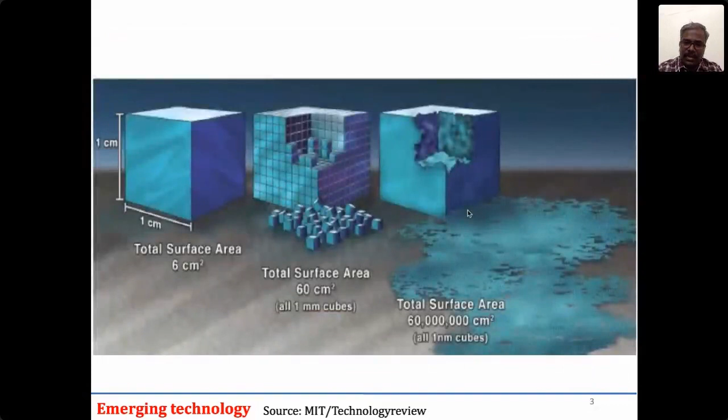So again, we come up with the latest technology combining with the earlier one, like nanotechnology with textiles, with roadways, with automobiles, with computers. So all the industries are interconnected, interdisciplinary towards nanotechnology, which gives efficient use of energy. And what do you mean by nanotechnology? This is a general outline of nanotechnology.

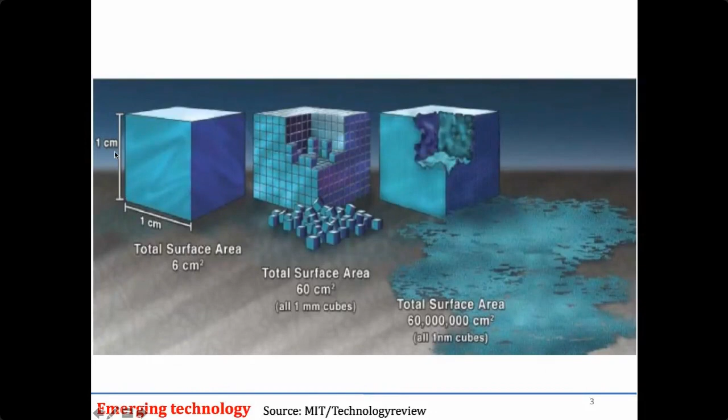For example, here we can see there is a square box, a 1 centimeter by 1 centimeter cube. In this cube, we can see the total surface area. The first one shows around 6 square centimeters.

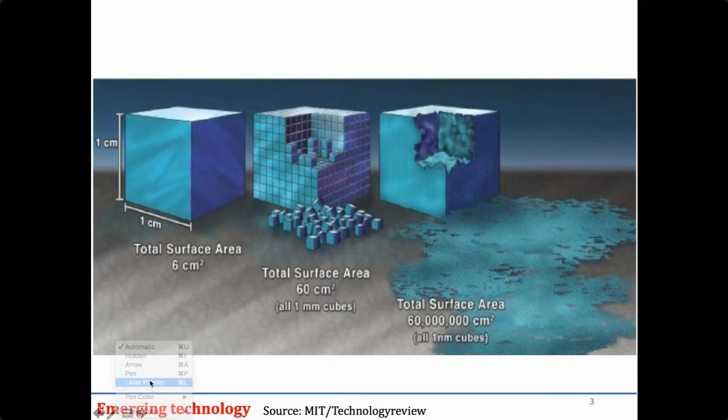So it shows 6 centimeter square. But when we see here the second square cube, it chopped about 1 mm. We can see it can cover a surface area of 60 centimeter square. So when we chop the square cubes into 1 nanometer, we can see that 60,000,000 centimeter square can be generated. That is, significantly, we can see that from bulk, that is big size, to small size, it can increase the surface area.

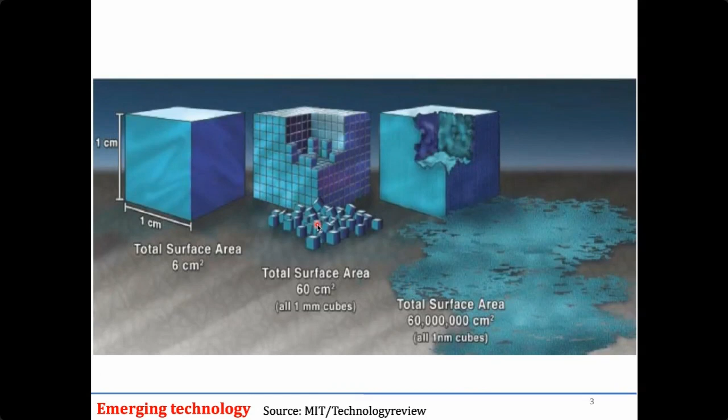So this is the ultimate aim for why the emerging technology, nanotechnology, was implemented in all the industries. And what are the ways and approaches by which nanotechnology was implemented? Nanotechnology was implemented with two different approaches for fabrication of the devices. One is a top-down approach, the other one is a bottom-up approach. The top-down approach is generally called physical methods. The bottom-up approach is called chemical methods.

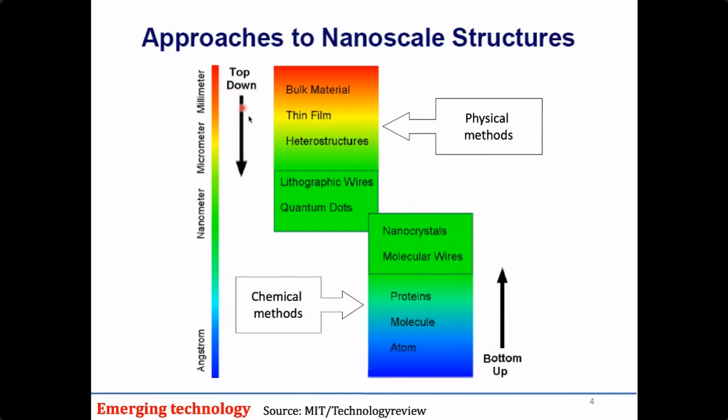That is, we take some molecules, atoms, all those things, from molecules and atoms towards nanomaterial. Nano means 10 power minus 9. So till that range, it will be designed. And if you take the top-down approach, as we have seen earlier, like a bulk material, from the bigger size to smaller size it keeps on moving by using physical methods, like you can chop it, grind it to small size, or else you can go with coating, like the evaporation method. There are different coating techniques. So these are the two different ways the materials can come into fabrication point of view.

When we see the second aspect, wearable applications: smart watches, activity trackers, smart glasses. All these applications are not only for one aspect. For example, a smartwatch is not only able to show the time alone. It can show our physical aspects like step count. It can act as a pulse monitoring system, showing heartbeat pulse. So there are multi-applications, multi-scenarios involved in this. That's why it becomes smart. We are majorly working on wearable applications, because wearable applications have a major role in our day-to-day life.

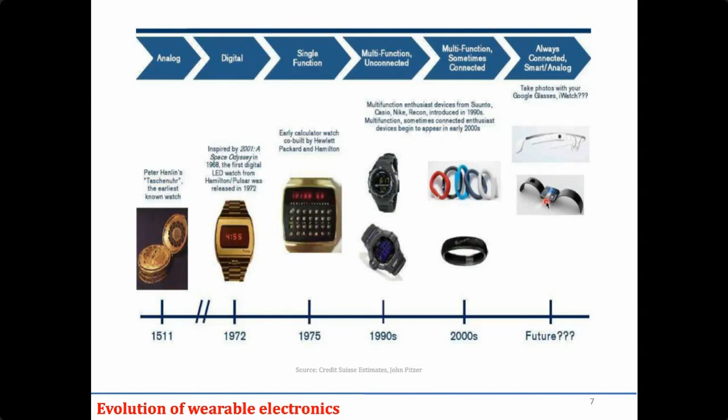And now the future is expecting more than that, with low power devices which can work on very low power, so they can go for a longer duration. That is what the future is expecting. But let's see the current global scenario: how wearable technology became more important and how the investment and technology boom was going on.

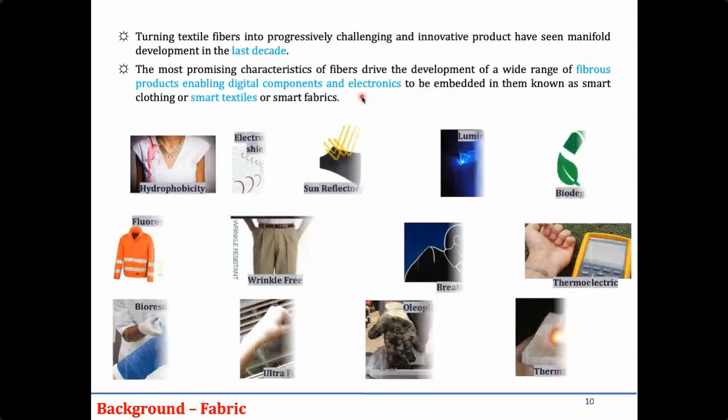And if you see the outline of textile-based technology applications in IoT applications, and not only limited to IoT, even beyond that, first we start with hydrophobicity, which is water repelling.

So the textile cannot absorb the water, it can repel the water. And the next one we can see is electromagnetic shielding. Electromagnetic shielding, in the sense it is able to block the electromagnetic waves, so the EM waves cannot penetrate towards your skin, because whenever the electromagnetic rays or the UV rays penetrate towards your skin, it leads to cancer or skin defects.

So to avoid that, what people try... Electromagnetic radiation is majorly involved in towers and X-ray rooms, all those things. And UV rays are day-to-day life. We are using sunlight. From the sunlight, we have three different regions: UVA, B, C. UVC does not reach us, but A and B will be there. And if A and B reach your body skin, it tends to cause cancer. So that's why people wear different colors, and dyes and colors were implemented to protect from the UV rays from the sunlight and illumination.

So there are many different applications, even wrinkle free, which is available in India. So no need for ironing every day. It's not required to iron for your lifetime. It's wrinkle free. The shirt was developed by Arrow Shirts. And even breathability. It can filter, like a kind of mask.

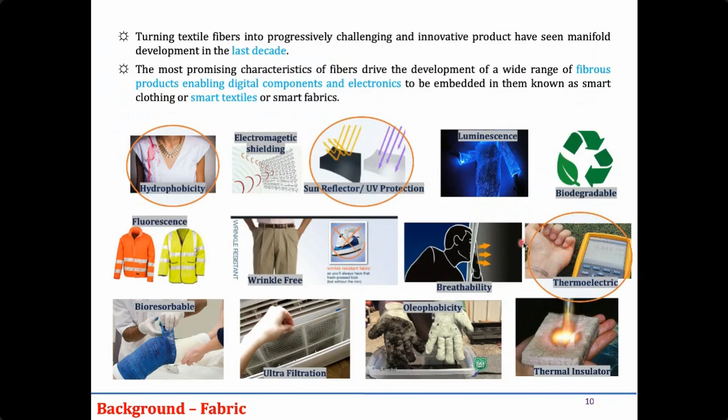But what we are doing in our lab is we are focusing on three applications. One is hydrophobicity, UV protection, and thermoelectric. Thermoelectric is like heat energy to electrical energy; the body heat can be converted to a voltage. So that is the purpose, we are working on these three applications.

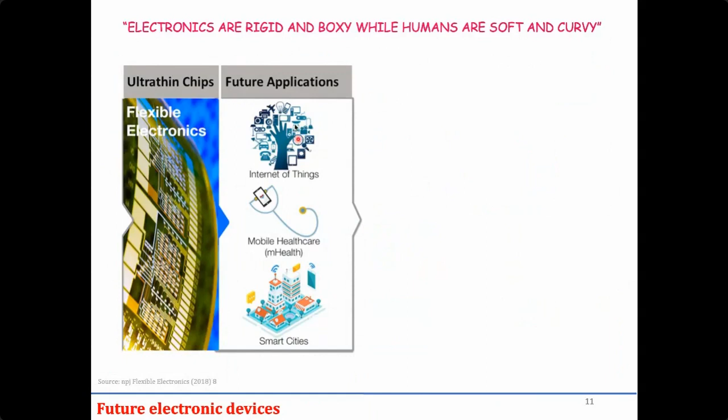And finally, we are moving on to how the technology will be involved and what sectors it is majorly working on. For example, if you take flexible electronics, there are three different applications people are working on. One is IoT, the other one is mobile healthcare, the other one is smart cities. So if you take any sector of the future applications, it involves four more subcategories: communication, integrated circuits, data management and energy.

Communication in the sense, for example, if you take mobile healthcare devices, ECG monitoring is going on from the body, and it is able to communicate with smart devices like a mobile phone or other devices. Integrated circuits in the sense, multiple chips can be integrated into a single chip, and it gives lower power, ultra-low power consumption. And data management: it has to collect the data daily, and it also predicts what happened in the past and what will happen in the future. So finally, energy. For all these three, to run them we need energy.

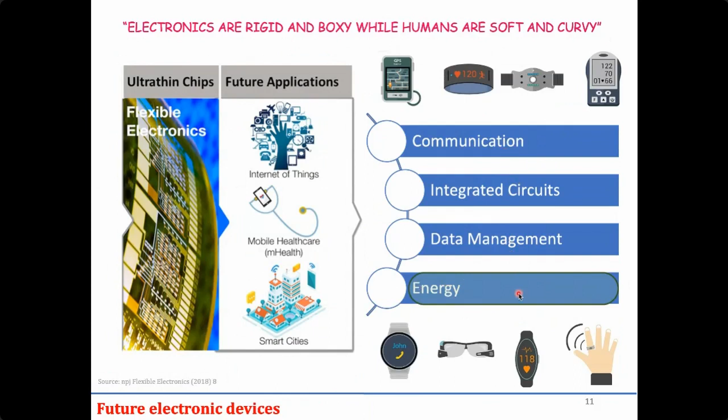So we can compromise based on the application aspect. If it's more from the communication point of view, we'll focus more on communication. If you focus more on ultra-low power sensors, we go with the integrated circuit. If it's more the data aspect, we go with the data aspect. All these three are interrelated, but we can vary them based on the applications. But energy, we can't do that. Energy remains the same. So energy plays a major role for all this. We can compromise the others, but energy we cannot compromise. So that's why in our research lab we are focusing on energy applications.

So when we talk about energy applications, what will it generally be? Whenever we talk about renewable energy, it should be new renewable energy, but it should protect human life. It should not affect human life. So that is the major scenario. For example, today's challenge is global warming. With global warming, there is a decrease of energy resources. Due to this, CO2 emission keeps on increasing, and the sea level keeps on coming up. So due to that, we need energy that is renewable and green in nature.

So it should meet certain criteria. For example, it should be safe, not harmful to the human body, and it should have sustainability, that is, it should not break down in a short lifetime, but be easy to dispose of, because whenever we develop any technology devices, a major problem is disposal. So how electronic gadgets or electronic devices can be disposed of easily, that also we should consider when we go with new renewable energy. But whatever we do at the laboratory scale, it has to scale up with the technology also.

So that is a way of incorporation into technology. That is, small devices which are a prototype or proof of concept which we're developing in the laboratory have to go with the technology, and with a longer lifespan also. For example, if I do some technology development today, it has to last not for a year, it has to go for a decade. So it has to go for a longer lifespan with minimal maintenance. That is a major advantage we require when we go for renewable energy.

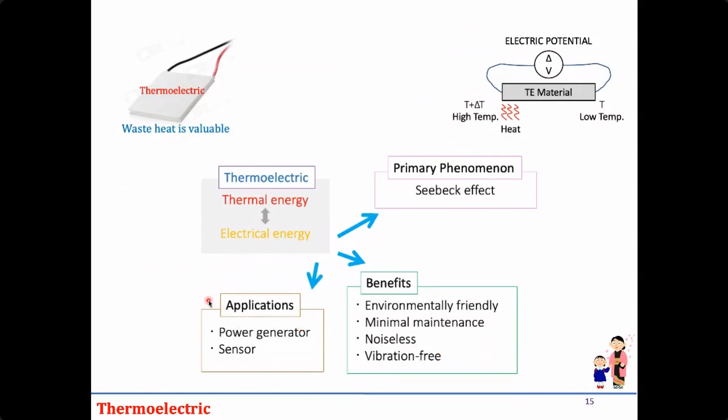And with thermoelectrics we have more advantages, for example very minimal maintenance. Environmentally friendly; we know that solar and this are both environmentally friendly, but very minimal maintenance is required, and it's noiseless. It doesn't give any humming noise, and it's vibration free also. Thermoelectrics have two major applications: sensors and power generators. We are working on the power generators.

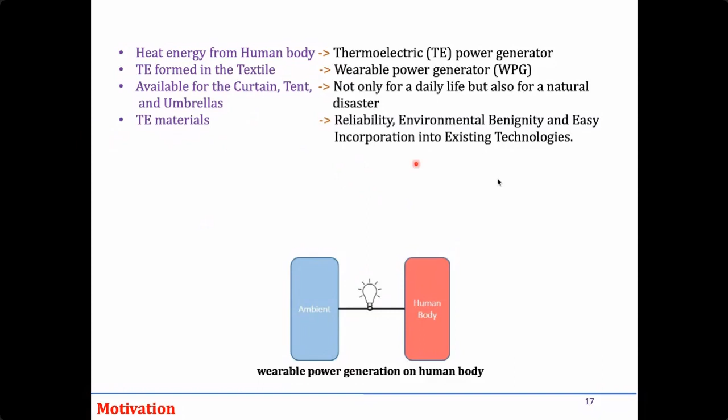And why we always go with TE material is that it is easy to bring to technology, as well as in medical industry applications, IoT devices majorly involve thermoelectrics. The reason is, implanted medical devices go with a battery. The battery does not give long term power, so we need alternate energy, or we need to replace the battery. Whenever we replace the battery, we cannot come back to the original calibration. We need to calibrate again every time we replace the battery of the medical device.

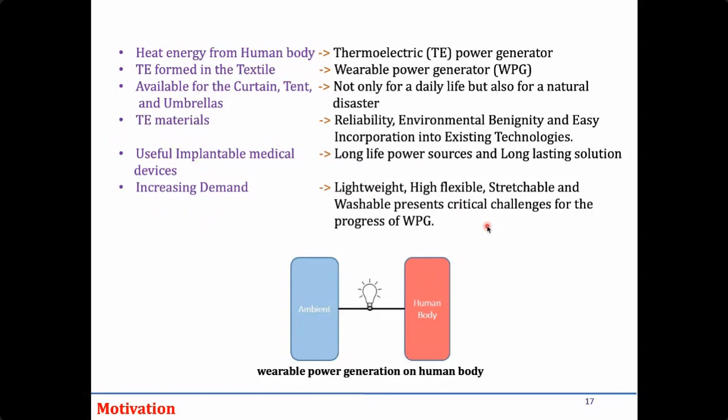So in that scenario, to avoid the calibration error, people are keeping an auxiliary renewable energy system which can charge the battery after regular intervals of power dissipation. For that reason thermoelectrics are majorly involved, as well as with increasing technology demand. For example, whenever we buy any technology, like a laptop or mobile phone, we always seek low weight, high flexibility and stretchability. These are the parameters we consider for technology development when we come to device making.

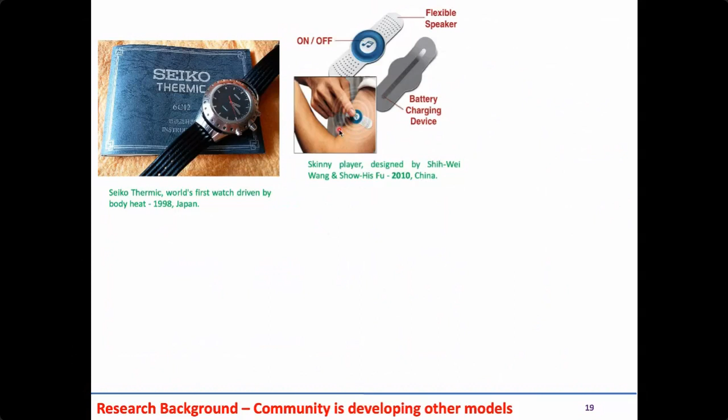And the next one we can see is the skinny player, which was developed by a Chinese professor. Whenever you put the sticker speakers on your skin, it can play songs from the device itself. And this device's power is taken from the body heat. The advantage of this device is, whenever there is rain, water, more sweating or whatever happens, it cannot peel off so easily. That is a major advantage of the skinny player. And it has preloaded songs also.

And next, even Nokia has developed devices. We can see here Nokia E, which is environmental, Cu is copper, which was developed in 2011 and released in London. It was R&D with a very small number of people working on it. And here we can see the backside is a copper grid, which, when you put the device in your pocket, can charge the device. It doesn't require any separate charger to charge the mobile phone.

And next, as I said earlier, based on the activity of the body, it can increase the power. So here the person is dancing and here walking. Normally it requires 10 or 12 hours to charge mobile phones. But when you do more activity, more power is dissipated. Due to that, it can charge in 15 to 20 minutes also.

And finally, we can see Fujifilm. Fujifilm has been working with the Advanced Institute of Science and Technology in Japan since 2013. They developed a transparent polymer. Here we can see one end is room temperature, the other end is body heat. Based on that difference, the device will work on and off. So these are the real-time applications in the market, based on the body heat alone.

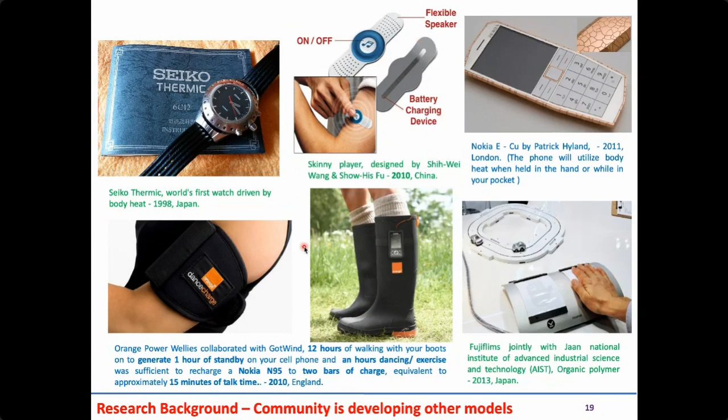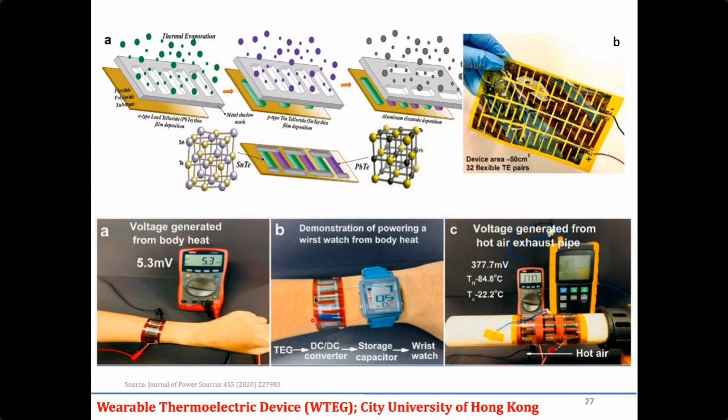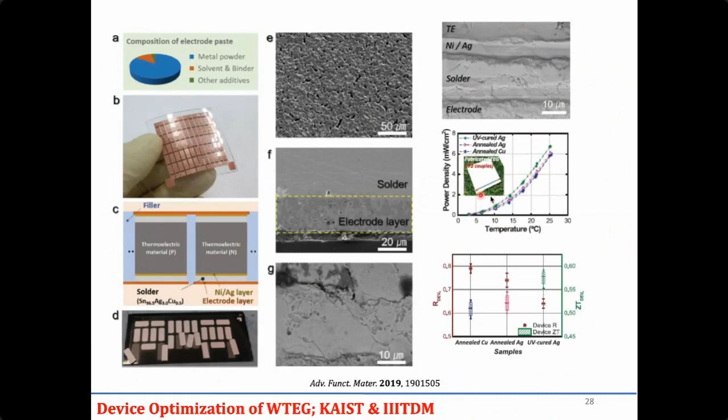A transparent device can be generated, and it can give a maximum power density of 6 milliwatt. It's not a microwatt, it's a milliwatt. 6 milliwatt power can be generated. This is the highest efficiency of power generated as of this year.

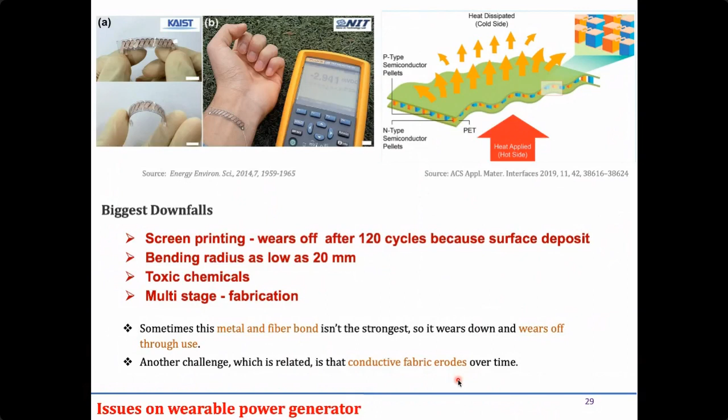And what are the issues that come again? Even though we tried screen printing to replace the electrodes, the problem is flexibility. That's why people started working on fabric based devices, because the fabric does not erode or corrode so easily. And with conducting fabric, even over a long time, it does not break down so easily.

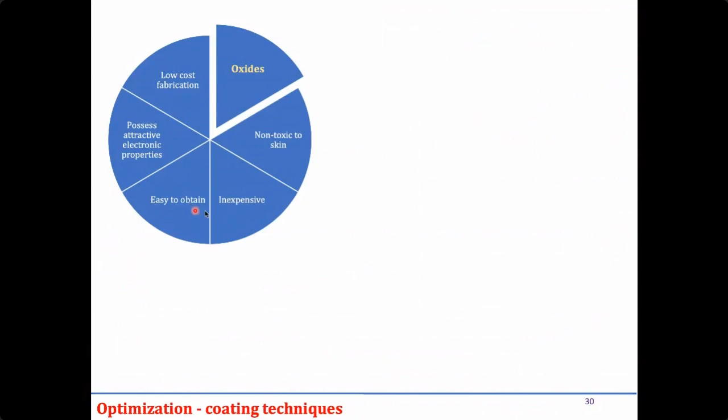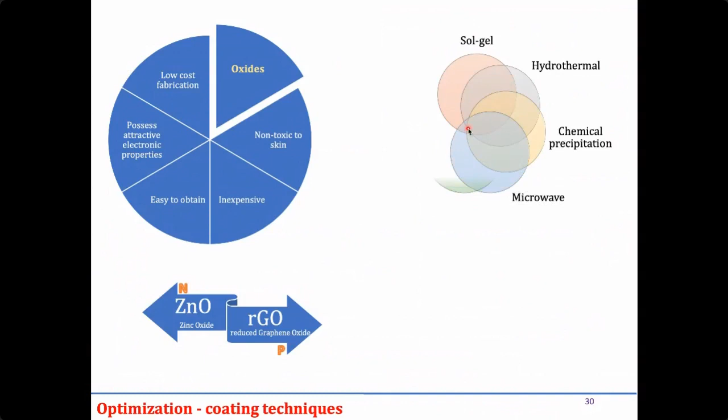We started our research with oxide based materials initially because they are inexpensive, easy to obtain, and non-toxic to the environment. For P-type and N-type materials, the P-type material initially started with graphene oxide, reduced graphene oxide, and for the N-type material we went with zinc oxide. Next, we can see the different methodologies used here, like the sol-gel process, hydrothermal, different chemical method approaches, and even sputtering, the top-down approach, which I showed earlier in nanostructured material preparation, top-down and bottom-up approaches.

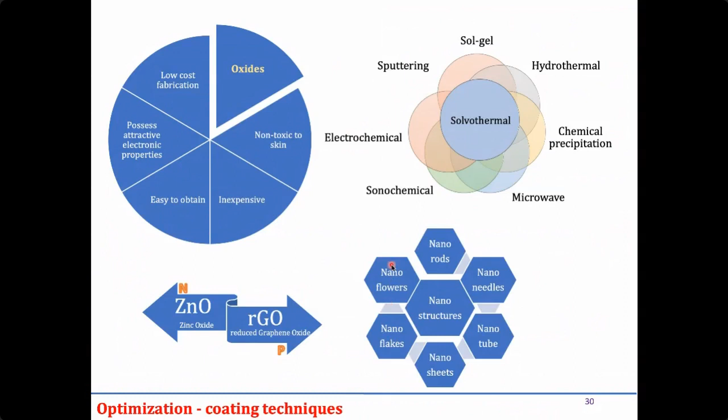After that, different nanostructures can also be developed: 1 dimension, 2 dimension, 3 dimensions, like nanorods, nanoneedles, nanosheets, nanoflakes, nanoflowers. Different structures have been generated. How we generate the structure: we take a fiber, over the fiber we generate a seed layer, and above that we make a growth layer. Because of this, sheet-like nanostructures were obtained easily and can also be customized.

So now finally comes to our lab, what we are doing exactly. So our lab has 4 categories. One is materials engineering, like in my previous slide. We do different types of materials engineering, and we develop the devices, and finally we validate the devices.

To develop the devices, we need to test the device's bendability, and we need to measure the device's power. So we need to validate those devices which we develop in our research lab itself. And finally we integrate with real-time scenarios also. For example, there are real-time existing devices, and with the help of the existing devices, we need to integrate the device. So for those scenarios, we go with these methodologies.

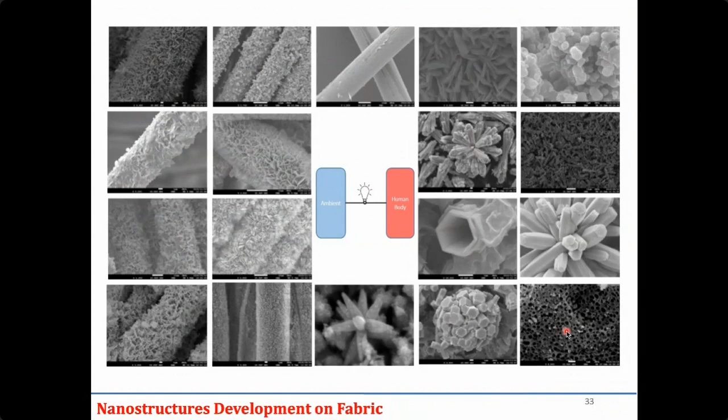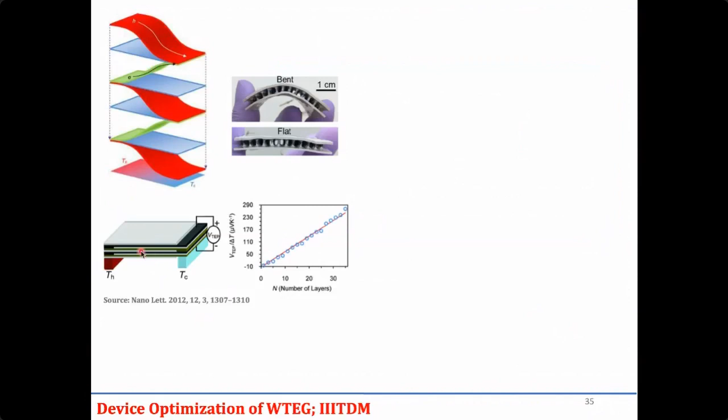And next one is device development. In this device development, traditionally, the traditional device was rigid in nature, it doesn't bend much. But when we go with fabric-based devices, we can put a p-type, n-type in between a dielectric layer, then p-type, n-type in between a dielectric layer, like that. Alternately we can develop the device like this. So p-type, n-type, p-type, n-type in between a dielectric layer, so the power can be generated like this.

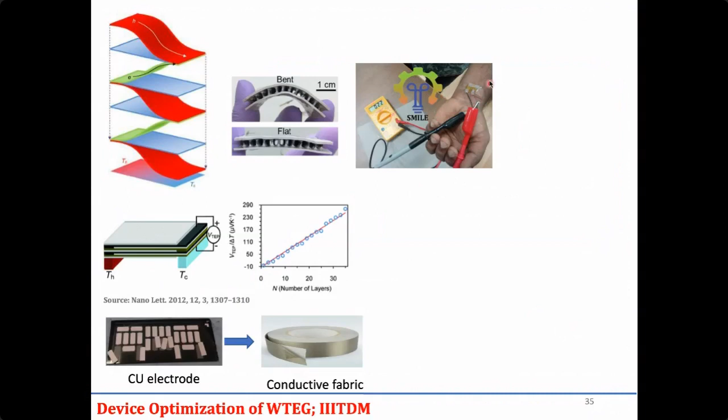So this power can be tapped from the body heat, and here we can see from body heat 2.2 millivolts can be generated. And we want to make sure with the difference of temperature, so we make a hot plate, like an induction stove. The hot plate temperature is 35 degrees, room temperature was 28 degrees, and the difference is almost 7 degrees. At 7 degrees we can see 2.8 millivolts was generated. So the power can increase whenever the delta T is increased.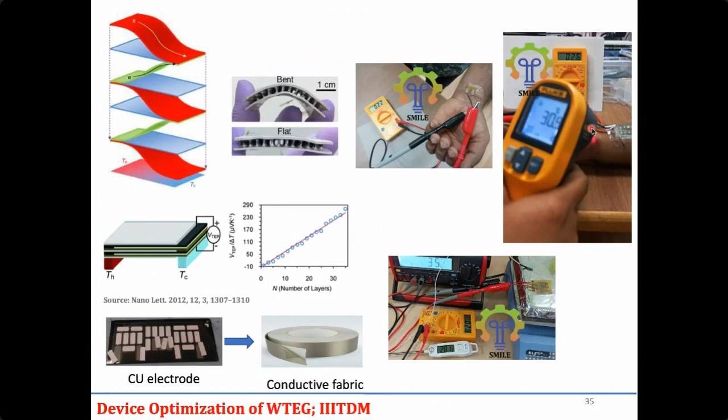And here we can see another device with a different material, which generated 2.6 millivolts from the body heat. So from the body heat, the power can be generated, which is really used for IoT device applications.

And next one is validating the devices. So we develop the devices; how do we validate them? For example, this is a traditional measurement device for thermoelectric measurement, but these devices are very expensive. So in our lab, we are developing devices jointly with Shizuoka University, Japan. We are developing a device like this, in a vertical manner as well as a horizontal manner, because whenever we wear the devices, we don't know whether we wear them vertically or horizontally.

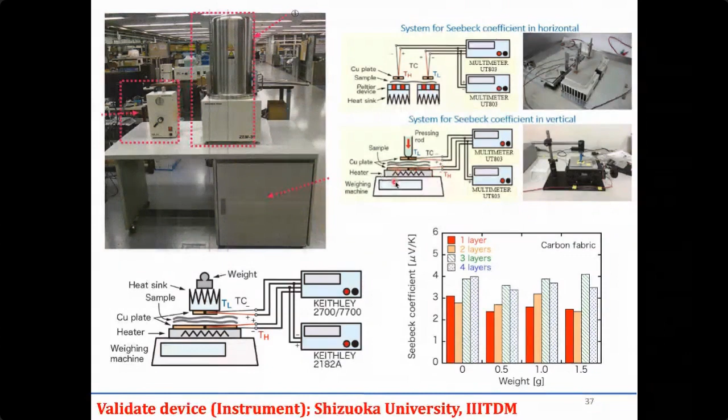So we need to test both vertical and horizontal scenarios, as well as whenever you give any pressure, because when we wear a shirt or something, wherever the particular patches generate power, compression or expansion will take place based on our body activity. So we need to test the mechanical strength property also, stress versus strain. So for that we developed devices to measure that.

And next one is integrating devices. In integrating devices, what we do is, recently we got a project from DST, and we are working on how power can be generated from tapping, as we can see in this example. This is jointly with Shizuoka University.

Initially we started with co-harvesting power from the piezoelectric and the thermoelectric. Here we can see there is a cold thermoelectric junction and a hot thermoelectric junction, and from the difference the power can be tapped, as well as from the piezoelectric on the other top. So it's like a bridge. For example, if you see a bridge, there are pillars, and over that the bridge is there, and due to the vibration it can generate power. So here we can see the example video.

So here we can see that initially there is 0 volt, no vibration was given. Whenever there is no vibration, no power is generated. Then the vibration is created. So here we can see that initially, whenever there is no vibration, there is no signal, no power generated.

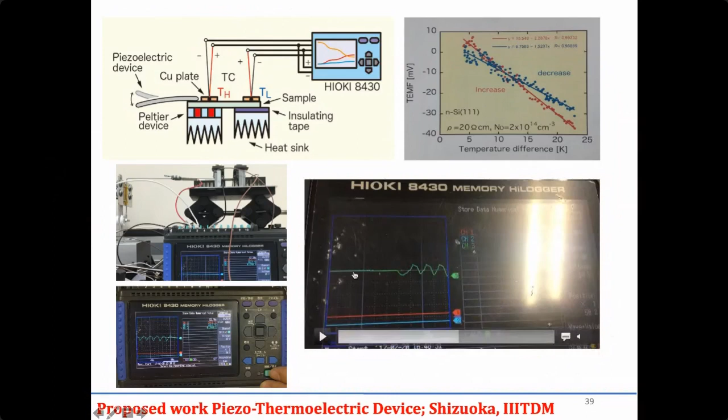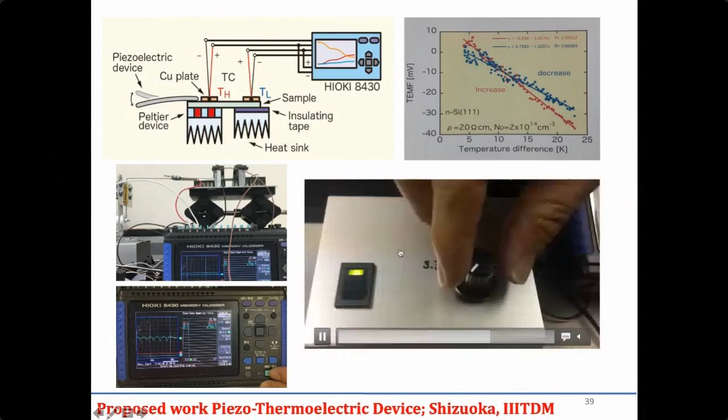But whenever we have the hot junction and cold junction, the thermoelectric power is generated, but there is no piezoelectric power. But when we increase the vibrations, the piezoelectric power is generated and the thermoelectric is also generated. Simultaneously both powers are generated. In the next scenario, when we increase the vibration speed, the sinusoidal wave power is increased, so the frequency is increased.

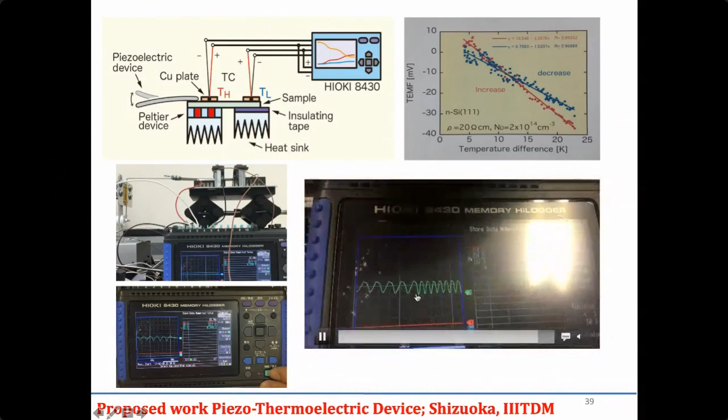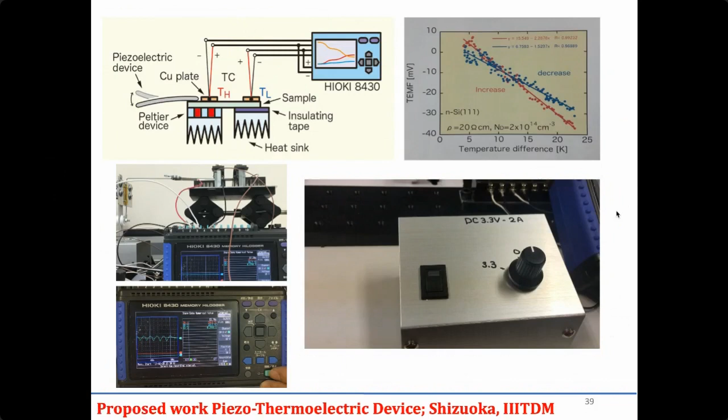So this is what happens whenever we tap the power simultaneously from the piezoelectric and the thermoelectric. This basic scenario was generated at Shizuoka University, our collaborating laboratory. But what we did is, based on this concept, we are generating the ECG signal. The ECG signal is tapped from the pulse. From the vibration of the pulse, we can generate physiological sensing devices.

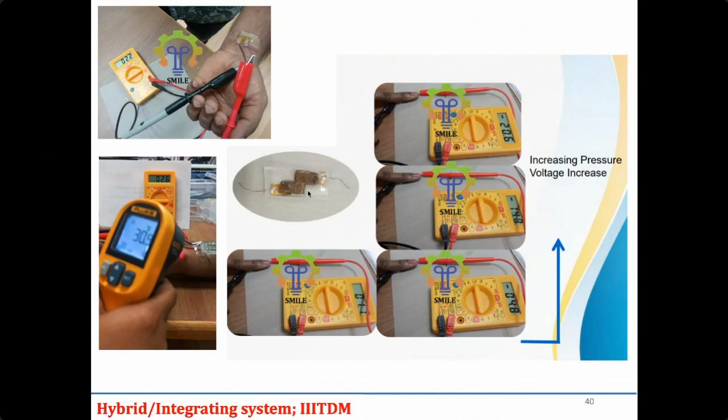So finally, the last slide. Our lab started from basic research toward the market, and right now we are at the demonstrable technology prototype stage for IoT device applications. For IoT device applications, the power can be tapped from the body heat itself.

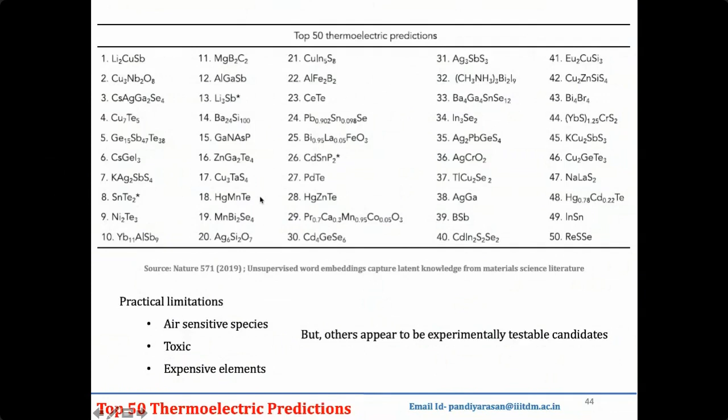So thank you. For people interested to work on thermoelectrics, our suggestion is, last year a paper was published in Nature. You can see the different new materials that were generated. Even in simulation, all these types of new materials can be explored in thermoelectrics for high efficiency power generation. So thank you. Any questions?

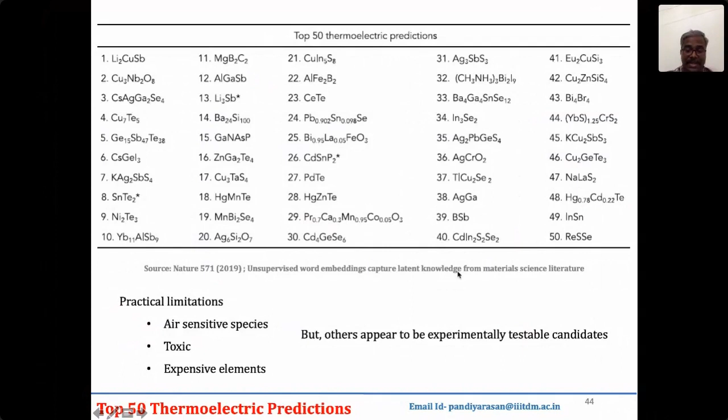Is the shape of nano devices fixed? The shape of the nanomaterial is not fixed. As I showed you in the example, we can see different shapes. The different shapes have different properties. Whenever we have a hollow structure, the scattering will be higher. Whenever we have a rod structure, the scattering is less. Whenever we have porous structures like this, the scattering will be higher. So based on the application and the scattering needed, we go with different shapes. It's not fixed, it will vary.

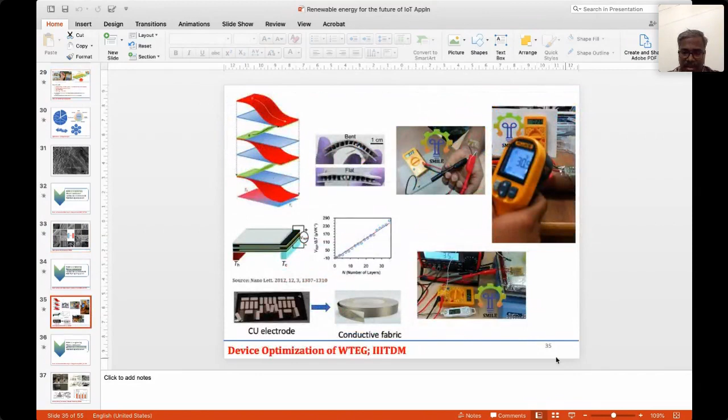Okay, sir. Next question. Is there any side effects of thermoelectric devices to human body? No, actually, if you see here the devices in our lab, we can show here. So here we can see that the device is covered with the filling material like a polymer. So whenever you touch the material, you're touching the polymer, not the chemicals.

So here also we can see that it's covered like a cellophane tape. It's like a transparent material. So here also you can see the polymer. So the device was developed and it's filled with the polymeric material, like our normal mobile phones. For example, if you see the scratch card of the mobile phones, it looks like that, so it's not directly in contact with your body surface, and it has up to 1000 to 2000 cycles of bendability. The device never breaks down.

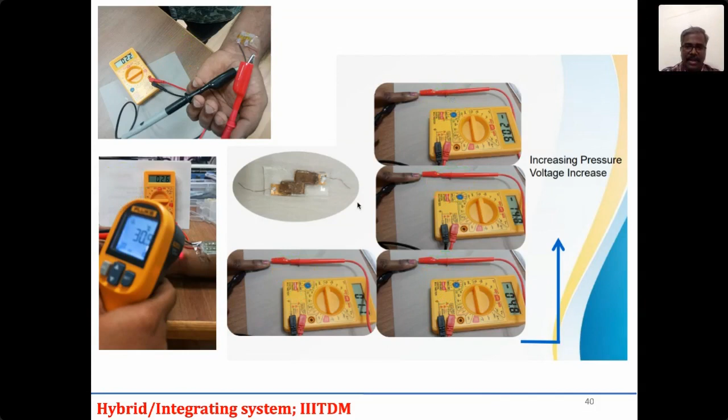Yeah, thank you, sir. Is there differential geometry used? Different geometry means, I think you're asking about material or devices. So if you consider devices, different geometry, as I showed you in the previous example, our lab is working on different geometry, like whenever you put the fabric devices vertically as well as horizontally. When we put it on our body, we don't know how the energy is going to be tapped in the vertical or horizontal nature. So for that reason we need to test vertical and horizontal.

It has a geometric nature, because in plane, in axis and out of axis, towards the in plane there are different phenomena, but towards the vertical axis direction a very good efficiency can be obtained for thermoelectric application.

Yeah. How is maths used here, sir? Mathematics. So here mathematics means the theoretical calculation, which is nothing but the ZT. So these three phenomena: Seebeck squared, then electrical conductivity sigma, and kappa. Not only these three; if you go with the Seebeck, again we talk about the Joule's effect. Joule's effect is nothing but the QH.

The QH is taken from Joule's phenomena, for example if it started from the cold and the hot junction, convection, conduction, and the radiation effects, so all these three different parameters we should consider, and we'll go with the effective mass also. Effective mass means, for example, m power star. m star is the effective mass, that is the mobility of the electron. So there are more phenomena. This is a general formula, but if we take only Seebeck, there are different phenomena involved.